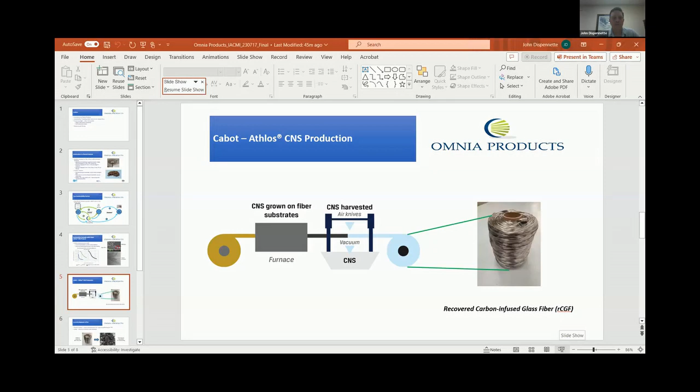As soon as I can unshare, I will. John, it's all yours. All right, great. Thanks for the introduction, Dale. We'll just go into slideshow mode and we'll be good to go. All right, so thanks again for the introduction. Yeah, we're good now. All right. Perfect. So today, hang on just a second.

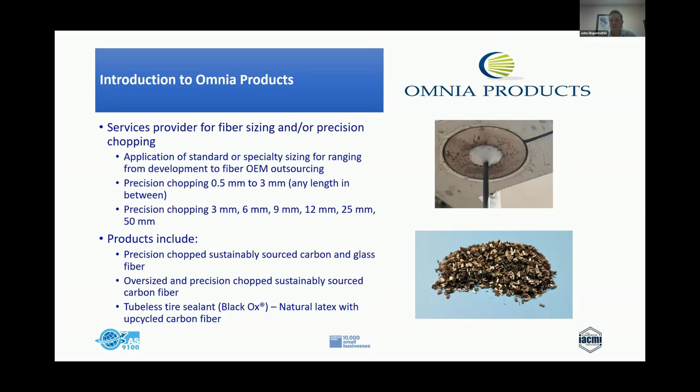And we also have products that we make ourselves with some of the upcycled materials, and that's a tire sealant. I won't really go into that today, but we do utilize some of the fibers for our own internal products as well. So this is how we fit within the supply chain.

We work with both customers and suppliers. We look at the customer side where we are reclaiming materials. A lot of times we'll chop their end-of-run material and provide it back to them so they can have a source of chopped fiber. Or we may work with other partners such as thermoplastic compounders, BMC, or wet laid companies where we chop or oversized-chop fiber, then provide that to the third party, which processes the material and provides it back to the customer. Today's talk will focus on that scenario, but we also work with companies that act as suppliers, where they provide us material and we find other opportunities through new products by repurposing it. So we're interested in working with both types of scenarios, but probably the one we do the most work with is the customer base, where we're repurposing or reclaiming material back for their particular use.

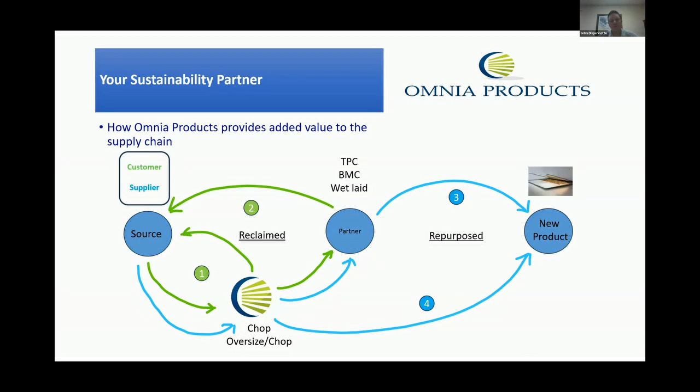Okay, so this leads us to today's example. We work with Cabot Corporation. They have a very interesting product: it's a CNS, or carbon nanostructure material, which they have trademarked as Athlos.

Here in the picture on the right, you can see in the red box the CNS material that has actually been grown on a substrate, which is the glass fiber. The glass fiber is highlighted in the green box. If you zoom in closer, you can see the branching structure of the CNS material in the lower image. So, very interesting material.

The advantage is it has a high level of percolation compared to other carbon additives, so it provides a continuous structure with less material. This allows, as indicated in the chart below, improved electrical performance with lower loading. You can see the CNS in blue on the left, at less than 1%, has an equivalent ESD rating to that of other additives, such as carbon black. So, very, very interesting material.

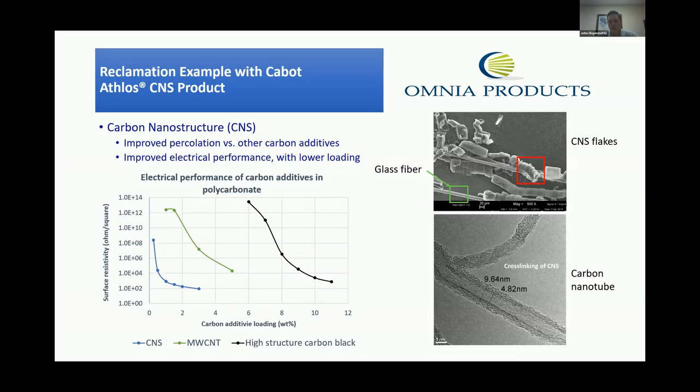So how that is produced is where we get involved in this project. On the left, you have a glass fiber with a catalyst, which feeds into a furnace. Inside this furnace is where the CNS substrates are grown on the fiber. As it exits the furnace, they are actually harvesting this grown CNS material off of the glass fiber through a series of air knives. That is where they're recovering the material for their Athlos product.

So then what's left as the fiber winds back up is the glass substrate. You can see the picture of this glass substrate to the right. This is a glass fiber, and you can see how dark it is. So there's a percentage of CNS material still left on the fiber tow. There should be some good value in this product, and we've been working with Cabot to figure out how we can reclaim this product and convert it into a usable format.

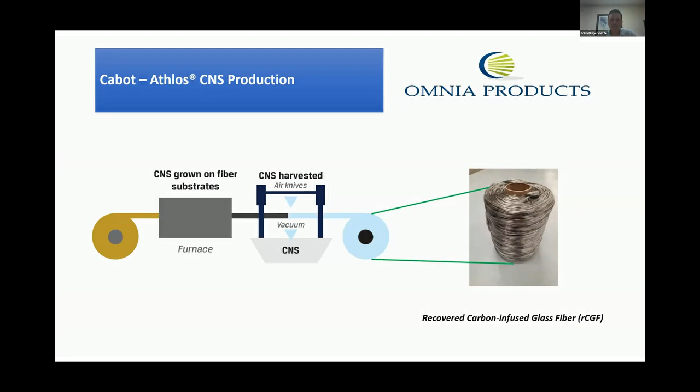During this development activity, we've been working with this doff material, which is a series of several tows combined into one, creating a very large multi-tow doff fiber. For this case, we've been focusing on how to convert this into a feedable pellet of thermoplastic-sized material for compounding applications. The result is the picture on the right.

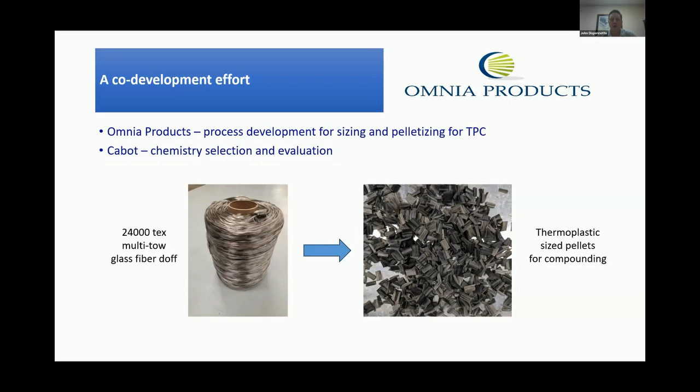During this development activity, Omnia had the responsibility of developing the process, figuring out an optimized way to handle and process this material. Cabot has been involved in selecting the chemistry and also in evaluating the resulting performance. In a lot of cases when we work with customers, they may ask us to do both, selecting the chemistry as well as developing the process. But in this case, Cabot has taken the lead in the chemistry. We're open to working in a variety of ways on various projects such as this.

So kind of what is the baseline? Why is this offering a good value proposition to our customers? What we have is a very low cost system. It is an automotive kind of pricing system, but we can achieve aerospace grade properties.

We can generate glass transition temperatures better than polyimides. We have a low infusion viscosity, so we can very rapidly shoot parts.

That's either through HPRTM, RTM, or VARTM. We have resin systems that are suitable for bath pultrusion as well as injection box pultrusion, offering some of the fastest line speeds that are available as well.

Also, the polymer is innately fire resistant, so we can generate structures from complicated processes like pultrusion that have quite easily met the FAR 25.853 standards for aircraft interiors or mass transit Class A E84 rating. So really some very exciting materials.

All of those properties are inherent to the material. So, aerospace properties from mechanical strength, stiffness, toughness, and fire resistance better than phenolics, with a very fast cure.

So we can actually, I'll show you, exceed the state-of-the-art epoxies and snap cure systems, and exceed what vinyl esters and polyesters can do. And we can also process parts quickly with the low viscosity, whether autoclave or out-of-autoclave processing.

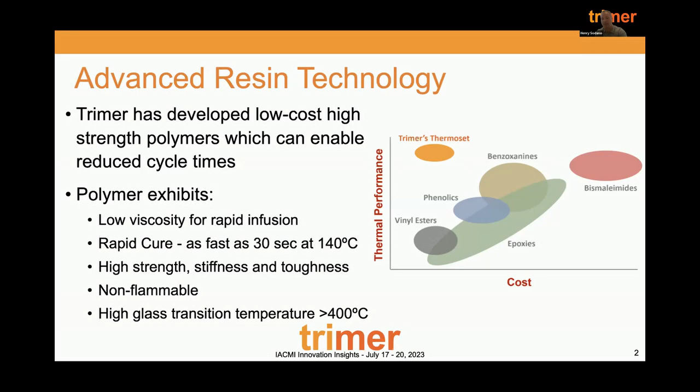Just to show you a little bit of properties here, the glass transition temperature listed on this slide is the onset DMA temperature. That would be attained through as little as a 23-second cure, which is kind of the fastest process that we've run.

But you can attain very high glass transition temperatures with fairly modest cure temperatures. Across the screen there are a number of epoxies and vinyl esters. One thing you might note is the vinyl ester viscosity is totally dependent on styrene content.

Our resin is styrene free. So if you're thinking about future components where you may want to eliminate styrene and eliminate VOCs, our resin system is something that's going to enable that.

So if you're using brominated vinyl esters, you can move away from those types of systems. The mechanical properties you see are quite significantly better than competing automotive resin systems, these being kind of industrial/automotive materials.

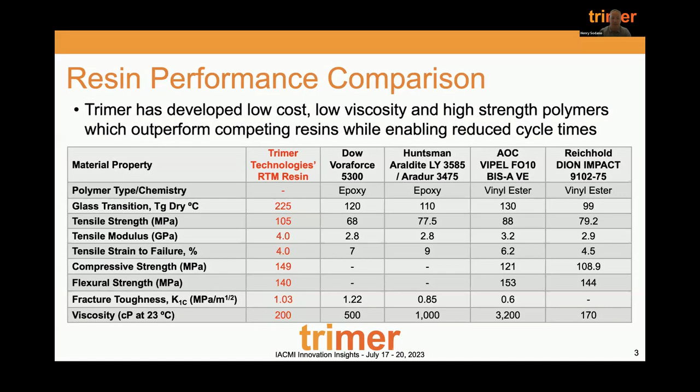It has about 20 to 25% polyether sulfone, so a highly thermoplastic character, but a very tough system, and we can compete with that material very well. The glass transition temperature I'm showing again is out of the tool at post-cure.

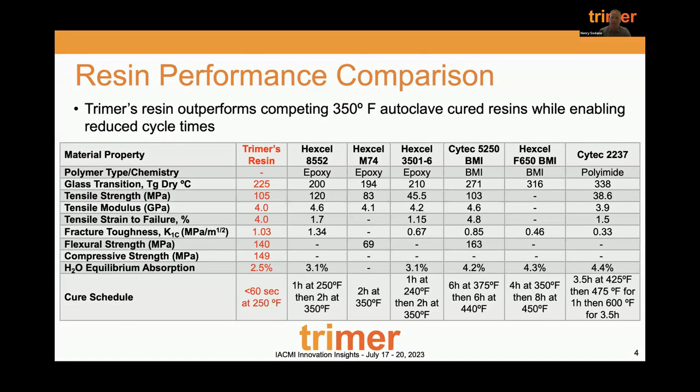We can achieve glass transition temperatures up to 400 Celsius. So we can actually exceed the polyimides shown on this slide, and we greatly exceed BMIs. So really kind of a unique system, being a system that is fairly high modulus—we were showing a 4 GPa modulus there.

A 4% strain to failure for an aerospace grade resin system is very good. A lot of times I might hear, well, you don't have that 7 or 9% strain to failure we see in some automotive or infrastructure systems, and that's really not something you want. Strain to failure in carbon fiber is 1.7%, a little higher in glass, but you're not gaining anything from having something that compliant. Really, you're just not generating the cross-link density quickly enough like we can do.

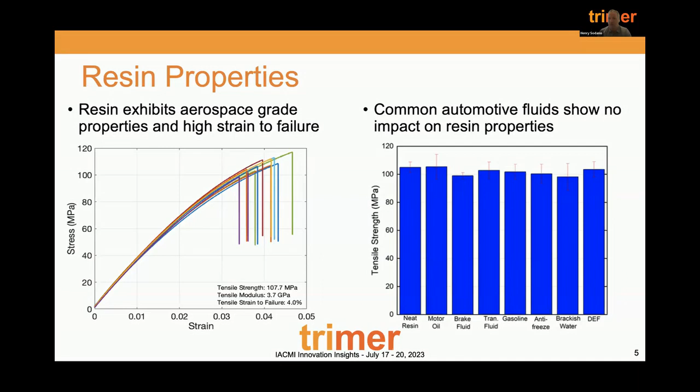Our chemical stability is excellent. We can't even do an acid digestion with nitric acid in this system—we have to switch to a piranha solution to do that. So really no change in the mechanical properties with any kind of solvent we've seen, despite that kind of compliance that this is a high modulus system.

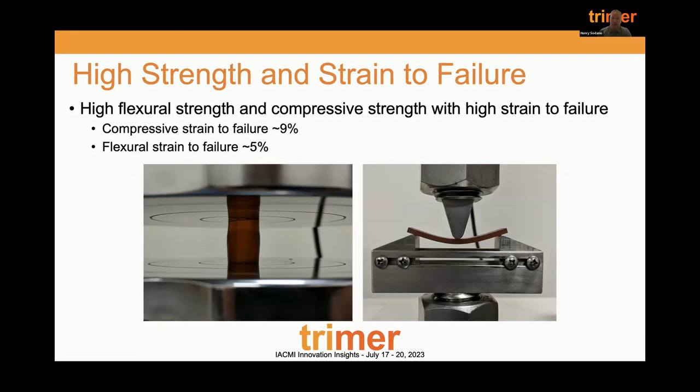On the left, I have a compression specimen at 9% strain prior to failure. On the right, we have a flexural specimen at 5% strain to failure, at which point the ASTM is actually invalid. So you can get very good compliance out of these materials and maintain that high strength and stiffness.

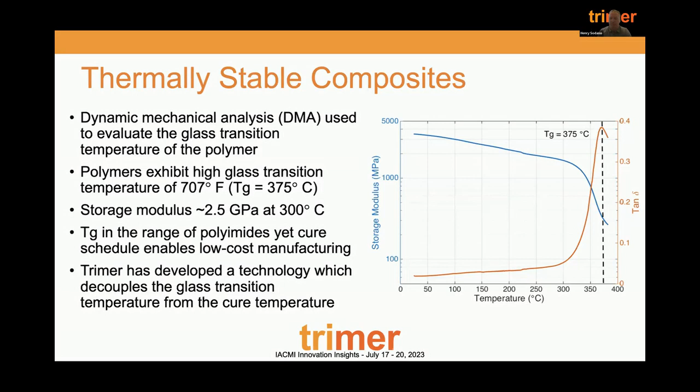And this could be just a standard system. We also have some more aerospace level performance options that perform a little better out of the die than you might see in some of our infrastructure materials.

Just to show you this high rate manufacturing, really one of the novel features of our material—our slowest resin system cures in about 20 minutes, and that's the slowest. Our fastest resin systems cure much quicker.

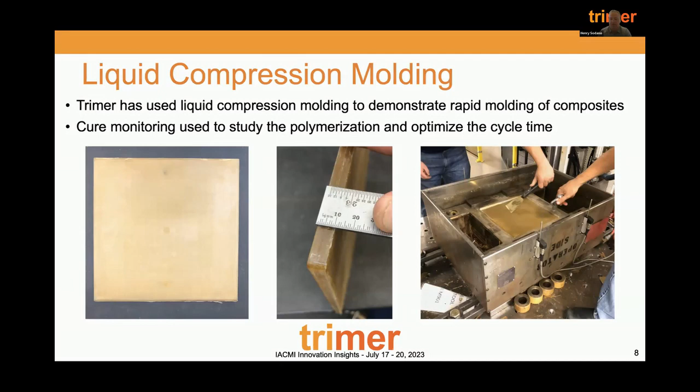The first 7 seconds is the press closing and vacuum being applied to the compression tool. As the resin comes in contact with the center and its temperature increases, you get a viscosity drop once you get better ion mobility. It reaches a peak, at which point we're starting to cure the polymer, locking up the material and removing ion flow, and then it'll drop down—when it reaches baseline again, you're fully cured.

In this case, at 30 seconds, given this 7-second press closure, we've cured that polymer in 23 seconds—extremely fast cure rate. This is a 3.5 millimeter thick fiberglass part with an unheated resin. If you have a preheated resin and you're doing RTM or HPRTM, it can go faster. Really, very, very quick material.

So what we did is we tested some thicker components. This is showing a 10 millimeter thick composite, cured in about 60 seconds. This thicker one here is shown curing in about 90 seconds. So really very fast—potentially too fast for some applications.

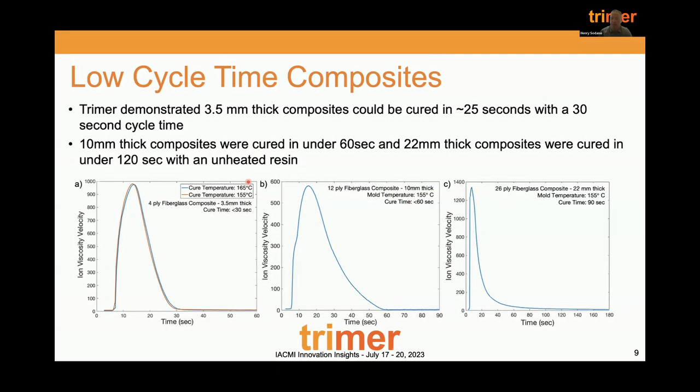And we can dial that in very accurately. So if there's a particular tool that has a long runner, a large part that we need to say, I need 40 seconds of infusion time. All right, well, we have a resin system that'll do that and it'll cure by 60 seconds. So we can really dial in kind of tailored performance for particular tooling or particular applications, manufacturing methods.

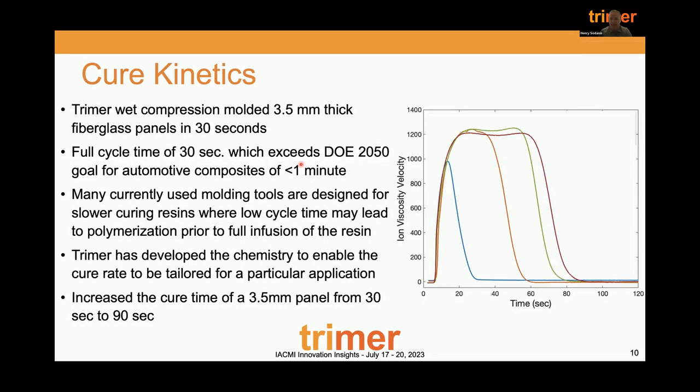This particular resin exceeded the DOE's 2050 goal, this was about 3 years ago, to achieve a cycle time of 30 seconds. And the DOE's 2050 goal was less than 1 minute. This program was funded by the DOE. I believe they've since revised that to kind of account for our system. So really kind of unique in its cure rate.

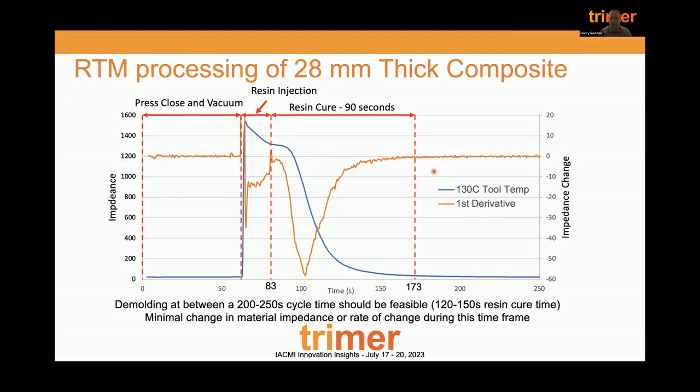We have also demonstrated we can make very long working life resins. So it doesn't have to be these fast components. If you're looking more at large-scale aerospace infrastructure-like parts, we can actually dial in that cure to be extremely latent. So in this case, this is something that was of interest for HiCam. It's a program to look at infusion of large-scale aerospace parts. The challenge that was posed to us is, can you manufacture a part with heated tooling at 85 degrees C, allow it to infuse over an hour and then snap cure following that.

And so you can actually use hot tooling rather than heating and cooling your tooling. So if you think about a wind turbine blade, that mold, a very large mold, is heated and cooled before the part's removed. This concept is, can we go to more of an automotive concept where you have a hot tool, it's never cooled, and you just continually replace parts in it.

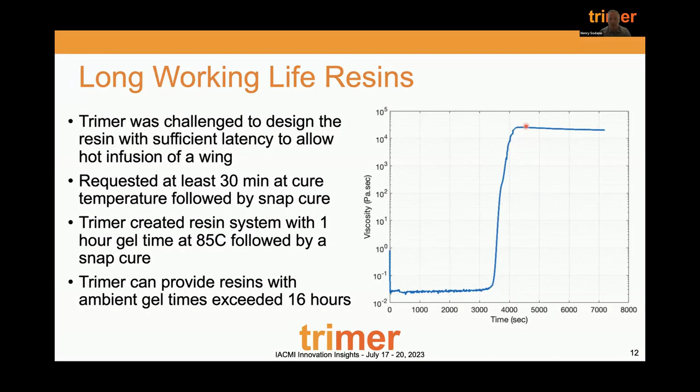And so that's just demonstrating we have about an hour, slightly less, but very close to an hour before we snap cure. And then about a few minutes later, it's fully cured and that part's ready to be demolded. So really, we can do some very exciting things in large scale manufacturing components as well.

One of our biggest application spaces right now is pultrusion. If you're familiar with pultrusion of fire-resistant composites, you're typically looking at brominated vinyl esters. These are being outlawed in the EU at the end of the year. Or you're thinking about phenolics. Phenolics have a poor toxicity profile. They also have very high void content due to condensation reaction and poor mechanical properties as well.

We're able to run very quick. We've demonstrated up to 120 inches per minute in certain profiles, but we can generate all of those mechanical properties and the fire resistance that's required for these parts from tooling that's in a high rate pultrusion.

I think the fastest you can typically pultrude, from what I've come to understand, is about 18 inches a minute for a phenolic, maybe a little less in many cases. And we're able to greatly exceed that while providing equal or better fire performance and significantly better mechanical performance. Really, that's a huge application space for us: fire resistant composite structures.

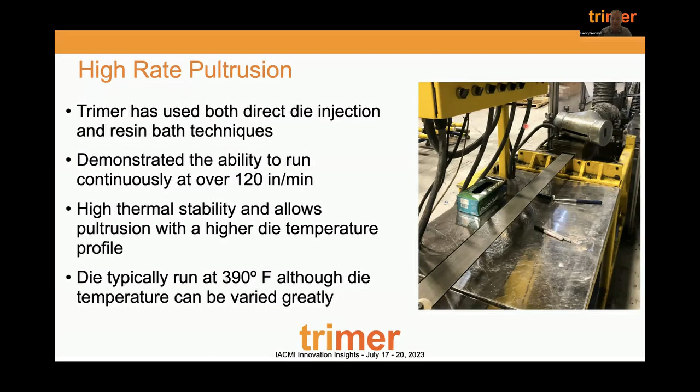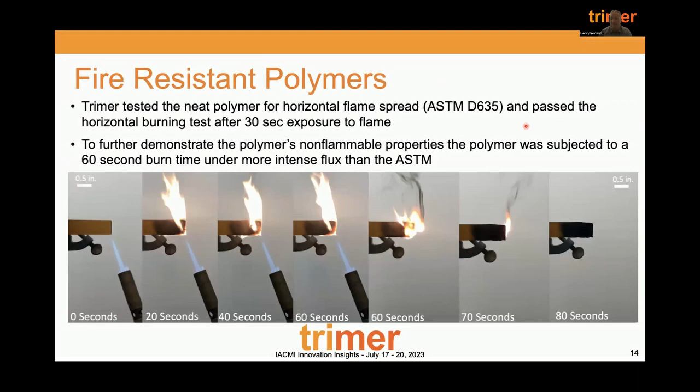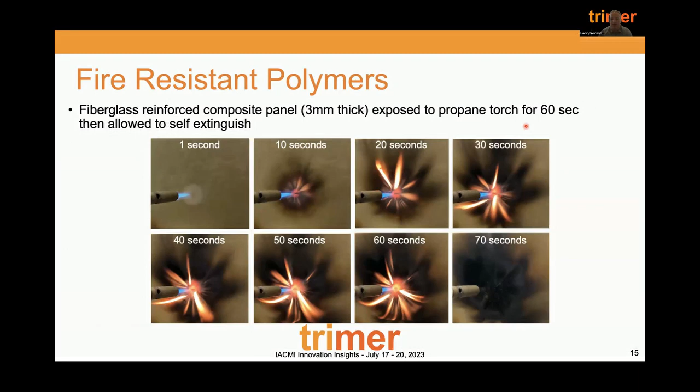I'm going to go through this a little quick here, but show you some data on fire resistance. This is not an ASTM standard. This is just a neat polymer being subjected to a blowtorch. It'll exhibit some small amount of flame, but no sagging, no flame spread, and it self-extinguishes very quickly. You do the same kind of test on a composite. This immediately extinguishes itself. This is a 3 millimeter thick panel. Didn't have any darkening or anything on the backside.

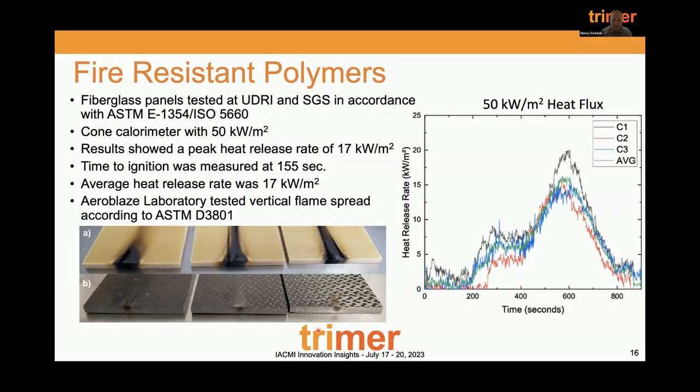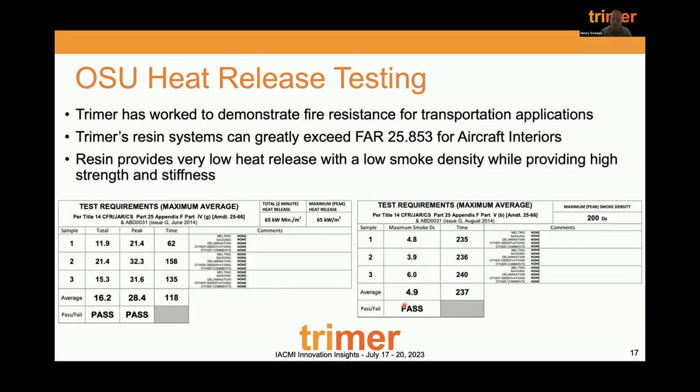Recently, with IACMI funding through the programs supported from the new consortium, we've demonstrated for Rinco composites that we have a Class A E84 rating with no intumescent. So we can do that with just neat resin itself. Our flame spread is 15 and our smoke index is 250. We actually had lower smoke generation from our neat resin than with an intumescent, and so we can really just use our system and reduce cost that way.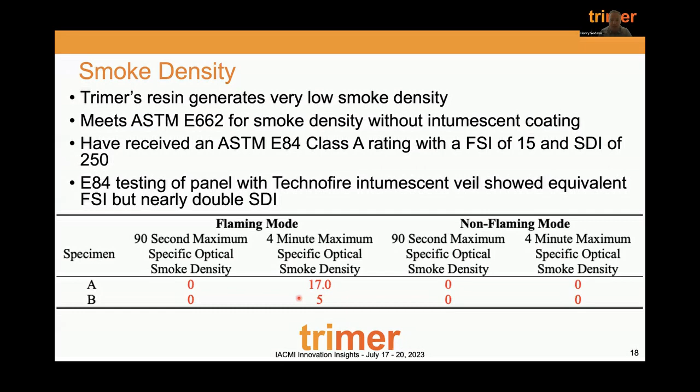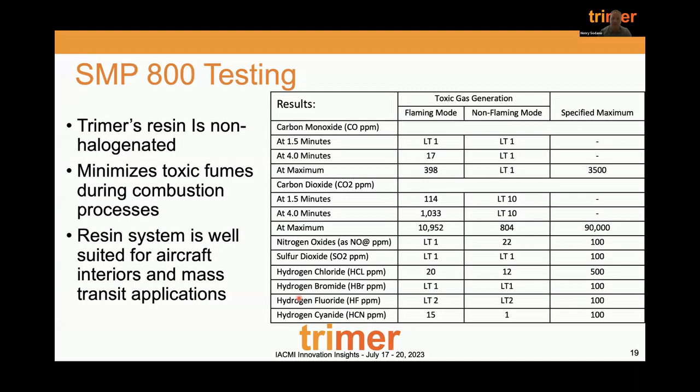SMP 800 is a smoke toxicity test. There's no smoke toxicity issues here. We're an unhalogenated system, with no styrene content, nothing like that. Our VOCs are very low, so we easily meet a smoke toxicity requirement.

And this, I'm just showing an application to show you how fire resistant the material is. This is neat resin. I get a lot of questions: can it be pigmented? This is pigmented orange, so that it meets what's required for a bus bar in a lithium-ion battery. So what we're showing is overmolded copper conductors that would be used for EV batteries, and this would be the insulating material. I have a video here.

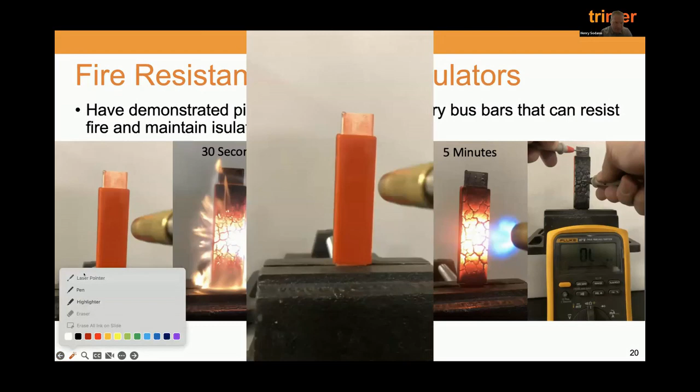Turn this pointer off. There we go. I'm going to accelerate this. I think I can. Yeah. So hopefully the volume isn't too loud on that for everybody.

This is a blowtorch that's being applied to this. It goes for 5 minutes, and I will just pull this along. It's basically inert. If you look at the flame on this, it's a very intense flame. So what's happening here is, again, this is about 4 minutes and nothing is happening. This is neat resin. There's no reinforcement, so it does fissure because it does have some pyrolysis and volume change.

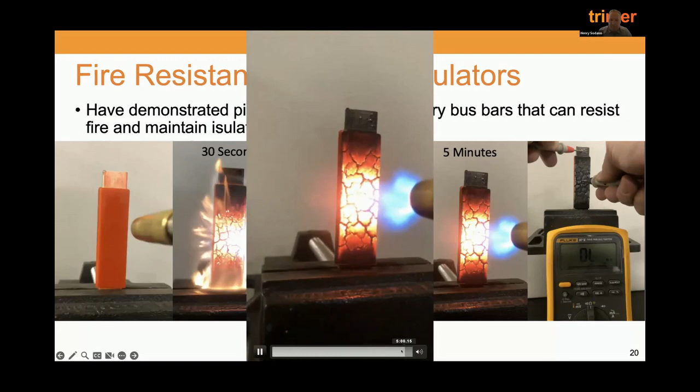And I'm going to stop it about here, and I will spin this part around, and you'll see it immediately flamed out. There's no residual. And on the back side of this, you see that it's not even discolored. So that's the thermal stability of the material, really high performance. And the right image and the static images on the back show that even in one of the fissures, this is still an insulating material. So if we did have a fire, we shouldn't have a discharge event.

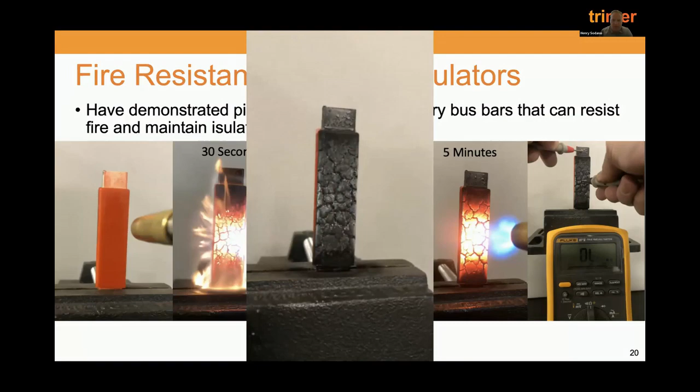So I don't want to take too much more time, but Trimer is excited to commercialize this resin system. If there's anybody that is looking for new systems that might achieve fire resistance or just strength, it doesn't really require fire. It's just kind of an added benefit. But what we're really trying to do is revolutionize the aerospace market. Our materials are generally significantly less expensive than any other aerospace resin. So if you're looking for a value proposition, it's quite easy for us to make.

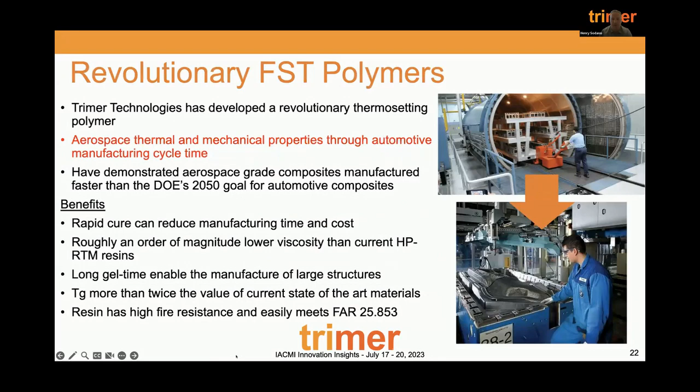Okay, all right. So we're running a little short on time here. There's another question in here for you. I'm not sure it went to everybody, so if you go in and answer the question online, that'd be great. Henry, it has to do with tensile strength on one of your slides, and I think that may have been a composite tensile strength, not a neat resin, of 1 GPa. So a couple slides back, yeah, right here. That's with fiberglass, non-crimp fiberglass. Yep, that was reinforced, not neat.

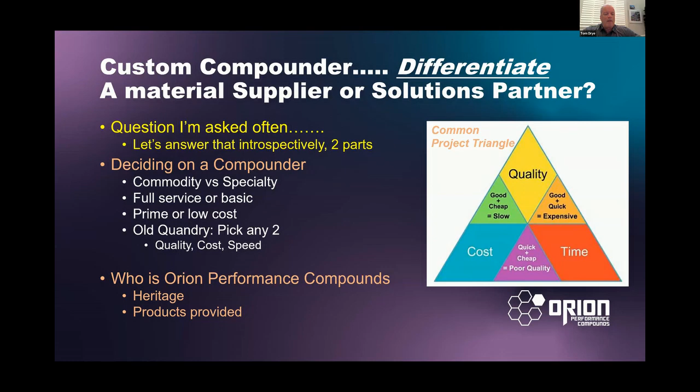So when you start a new company, such as we did, what do you build your company around? Our chosen driver of those three parts of the triangle is really quality. We're looking to make first quality products and meet the application needs and not over or under engineer it. So when we're driven by quality, what remains are the cost and the speed components, and we can manage the cost through our expertise and our value engineering expertise.

The speed element is kind of dictated by the equipment itself, and we think we've put in the right equipment for the type of market we're looking to pursue, and the experience level of our staff is really the key to increasing speed and getting products out the door quickly. And we do have some rapid serve type options if speed is really a crunch, and we want to maintain all the different aspects of that triangle.

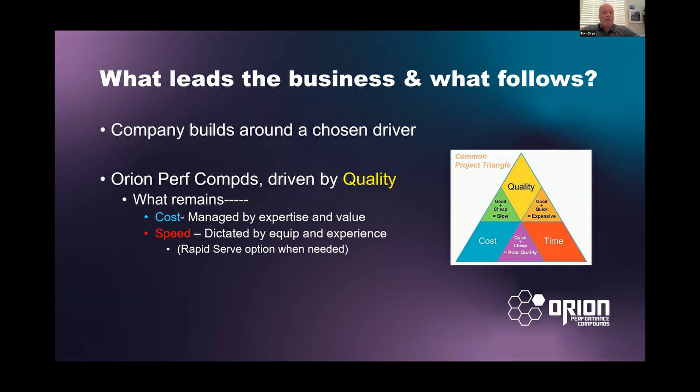So when choosing a reliable provider, some things you should be asking yourself, and we'll ask you as well, when you're trying to fairly choose that compounder, is what is the product breadth? We offer from polypropylene up to PEEK and polyamides. So we have a very broad resin family, but as you'll see later in our presentation, the number of different additives and reinforcements that we can put into it is really where the thousands of combinations come into effect. So when talking to a compounder, are they going to force fit you into what they have, or right selling?

Materials, are they biased or are they agnostic? I can tell you at Orion, totally agnostic. We're not married to any particular resin or additive or filler. We're looking to make the best product for the application. And is the compounder you're talking to or interviewing just interested in your business for today, or are they looking really for a long-term relationship to have business for years to come?

Are they looking just to shift something, or is it really truly problem solving that they're trying to accomplish with you? Improving performance, perhaps, or making the product more profitable going forward so you can grow your business. So, are they helping you grow your business is basically the question.

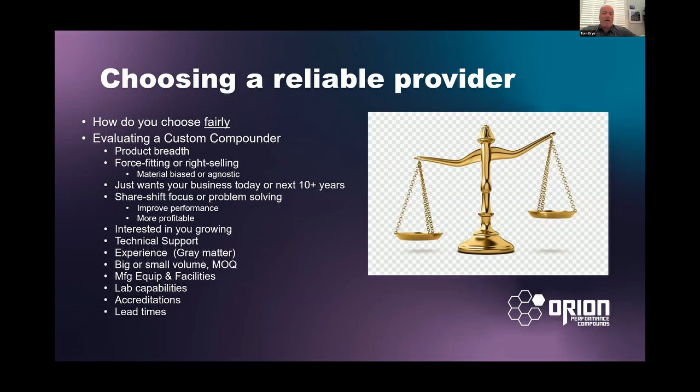Accreditations, what do they have as far as accreditations go? And of course, lead times, what's their stated lead times and how often do they meet those lead times?

So how a partner engages with you, the customer, as a partner, we look at it as a partnership. A good compounder will help keep you clean. When I say clean, they'll keep your orders aligned, get you on time, and more importantly, they're going to put all these messy, dirty additives into a nice clean pellet that will go through your plant with very little incident as far as accumulating dirt.

Logistics hurdles, let the compounder manage all those. We've seen logistics nightmares over the last couple of years. A good compounder will have the resources to manage those delivery times for all the additives and reinforcements and get them to you on time.

Crisis support. Oftentimes plans go awry, and to us, as a good compounder, that would be an opportunity to help you. A friend in need is definitely a friend indeed, and it's an opportunity to shine by helping you get out of a tight situation.

So that's the right material at the right time. Do they help bring you leads? Are they helping you grow your business? Using our extended sales team to help bring opportunities and leads to you as well.

Cost control. Margins, on a highly expensive material, you can maintain margins on things that are value engineered and lower cost materials. It really depends on finding again that right material for the right application. So margins can be made at any price level.

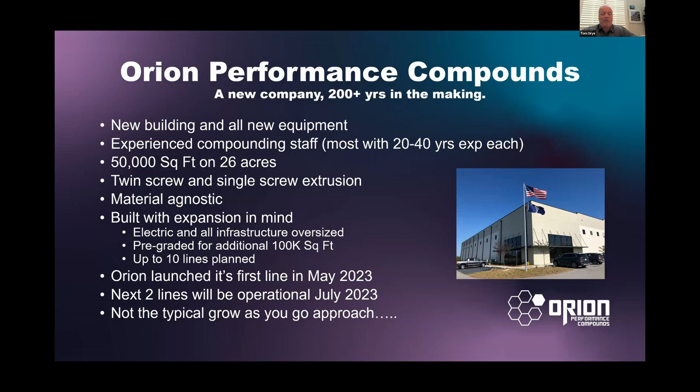We launched our first line back in May, and our next two lines will be operational later this month. This isn't the typical grow-as-you-go approach. We really started off pretty big, with a big facility, all new equipment, and a very experienced staff. This is not a slow start. This is jumping in with both feet into the deep end.

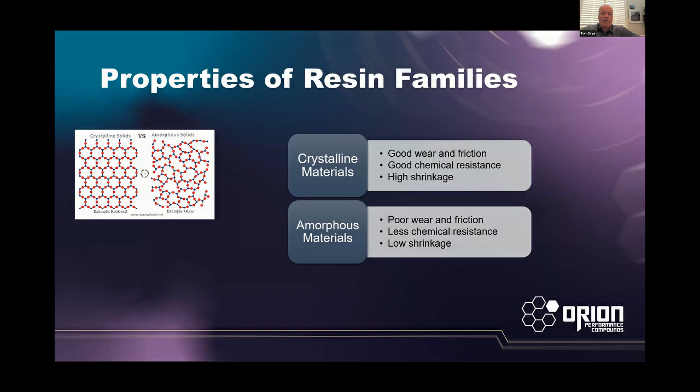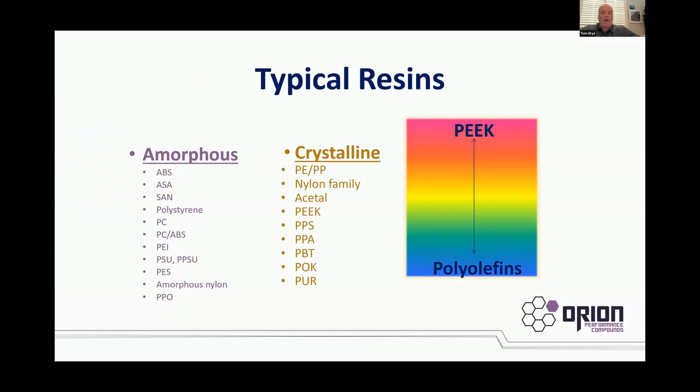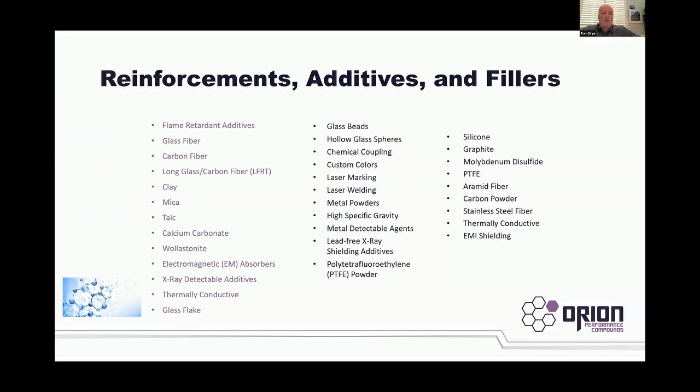I'm going through this rather quickly to fit it in the time slot, but our products go from polyolefins up to PEEKs and those resin families, with all types of reinforcements, additives, and fillers. This is a partial listing, but we have many different additives to customize the product for the application.

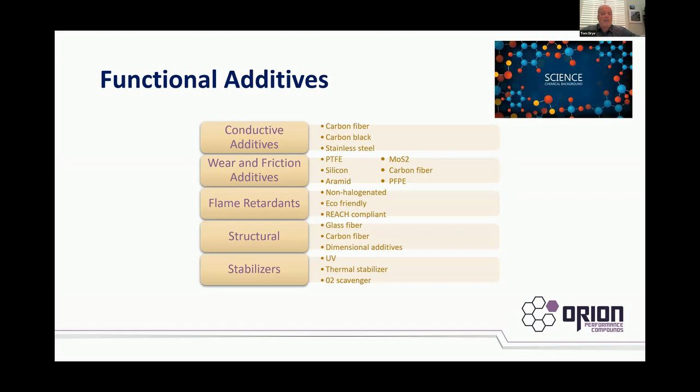Conductive additives like carbon fiber, carbon black, stainless steel, for example, and wear and friction additives such as typical PTFE, silicones, aramids, and others. Flame retardants are a big thing for us for our UL product lines, along with structural component materials and all types of stabilizers and enhancements. So basically, if you don't know what a compounder does, we start with plastic pellets from resin suppliers.

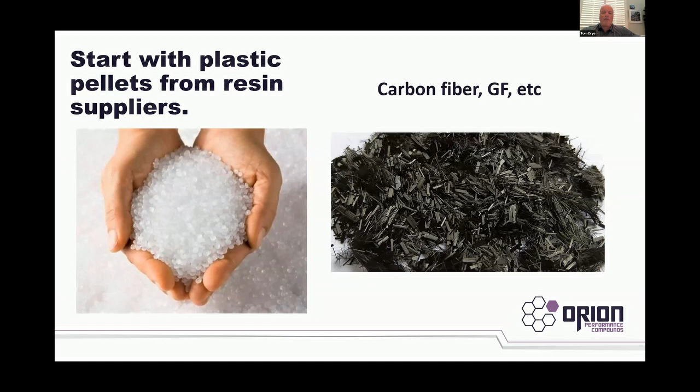We put things like carbon fiber, glass fiber, and all types of additives into it, colorants. We take those, put in our secret sauce, and pass it through a twin screw extruder. It comes out the die face as strands. We cool it, pelletize it, and out the door go highly specialized pellets. So we kind of start with pellets and end up with highly specialized pellets.

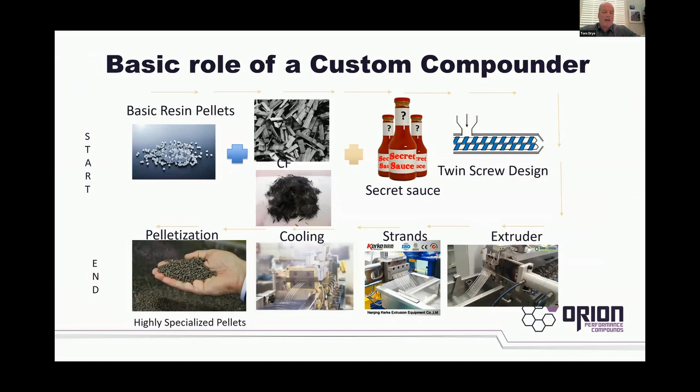If you haven't seen an extruder for thermoplastic, that's what they look like. And there are the strands coming out, entering the cooling bath.

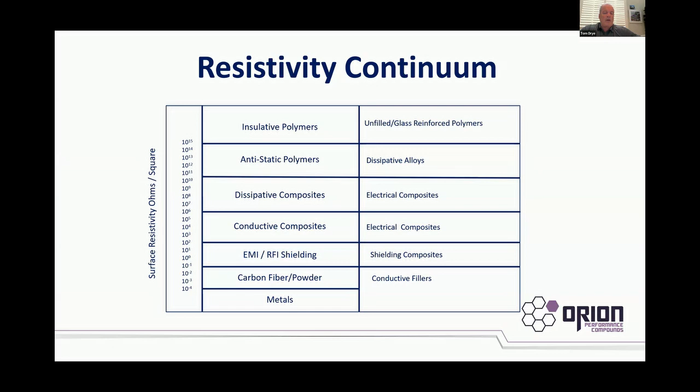Just a real quick resistivity continuum: insulative polymers start off around 10 to the 15th or higher ohms resistance, all the way down to maybe 10 to the 0, 10 to the 1 ohms in a shielding type of compound.

And some of the applications - here's some of the eco-friendly work we've done in the past at the previous company, some PLA with bamboo, again all environmentally friendly type materials.

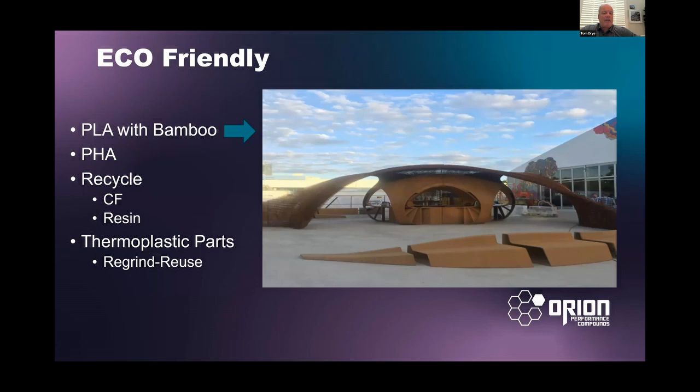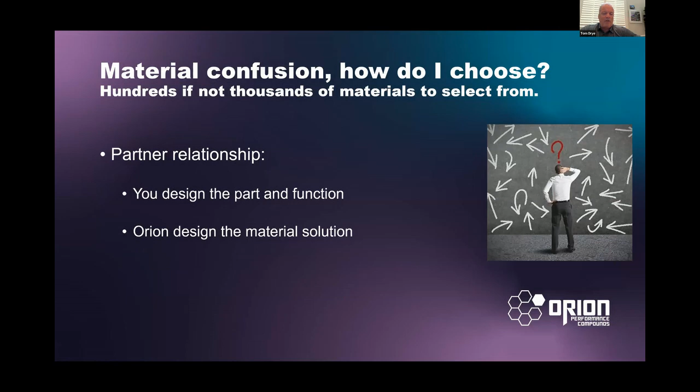There are so many different choices, and you as the consumer say, how do I choose? I'm really confused. But as the partner compounder, our job is to design and help you get through that. You design the part and the function, and then we, Orion, will design a material solution for you to remove that headache. So where do all these pellets go?

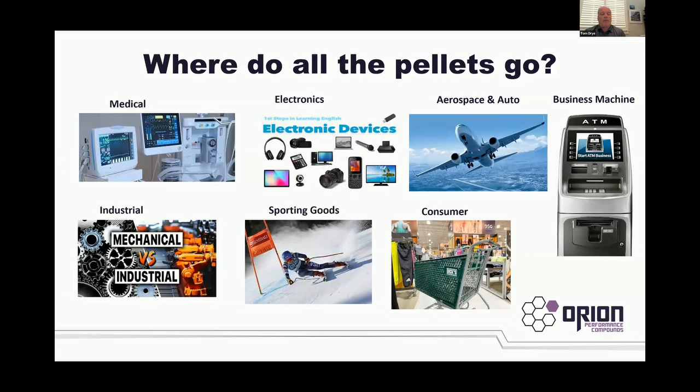Well, the markets that we pursue are medical, electronics, aerospace, business machine - pretty much every market space we are in, and we'll look to expand upon all these as well.

Construction and military - you see some of these applications from the past that we worked on, all types of neat and interesting things. These happen to be some 3D applications we did, some very large printed 3D materials.

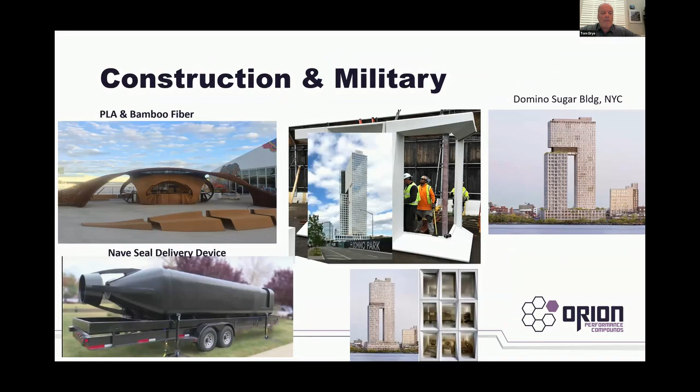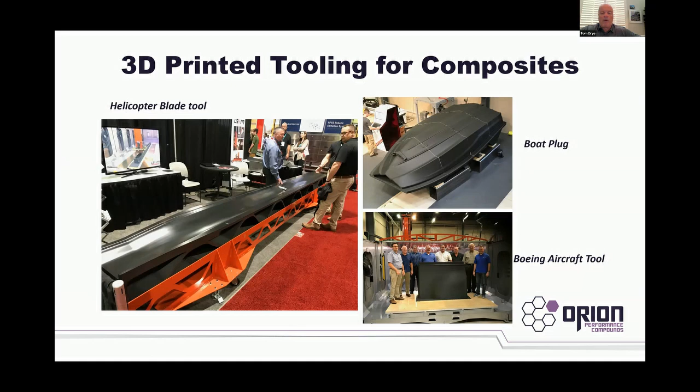Again, you see some applications we did: a helicopter blade tool, a boat plug tool, and down the bottom right was a Boeing aircraft tool. Some of these are, again, some of the really big 3D materials we made.

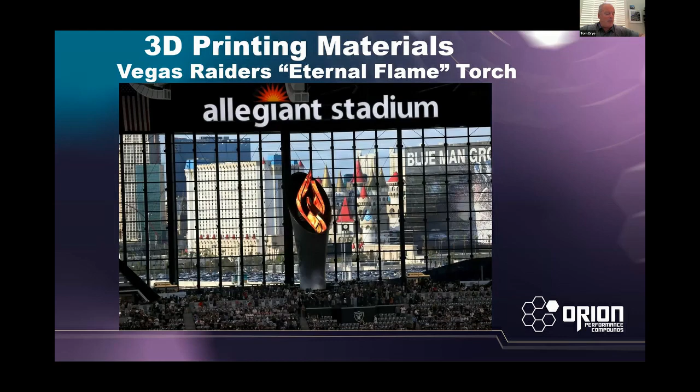If you saw the Vegas Raiders, that torch in the Vegas Raiders Stadium is stuff made with our material. Again, our past experience is where we come to light, where we come to shine, to help you with a product line or a product that meets your application needs.

So to wrap up, why choose Orion as your material partner? It's our entrepreneurial spirit, our vast experience. Yeah, it's in a new package, a new building, but it's the experience inside that building where it counts. Our minimum order quantities are 55 pounds, 110 pounds, up to truckload. Our technical expertise - and again, we sell properties and solutions.

We don't sell material - we sell properties in the form of pellets. We're a value-based solution provider, and again we're resin and additive agnostic. So we're problem solvers with a can-do approach. Thank you very much. We welcome the opportunity to be your compounder. And again, we sell properties. Thank you.